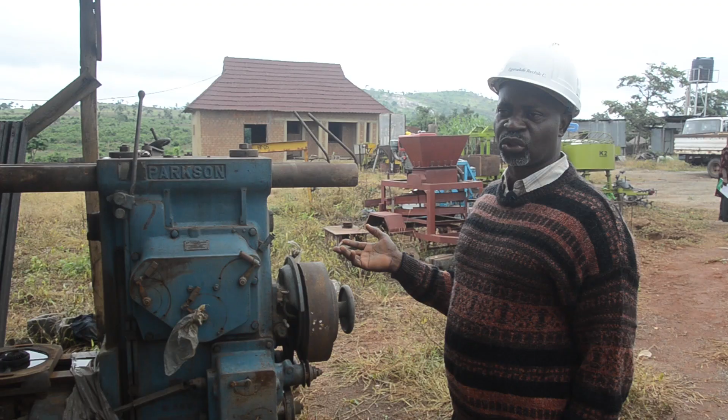For a start, let's take you to a technology farm here in Abuja where indigenous fabrication of machines is practiced. Meet architect Christopher Egwudali, a farmer, civil servant, and fabricator of machines. He is a typical example of a Nigerian with a burning desire to research, design, and fabricate multi-purpose precision machines using local materials and expertise to achieve his objective.

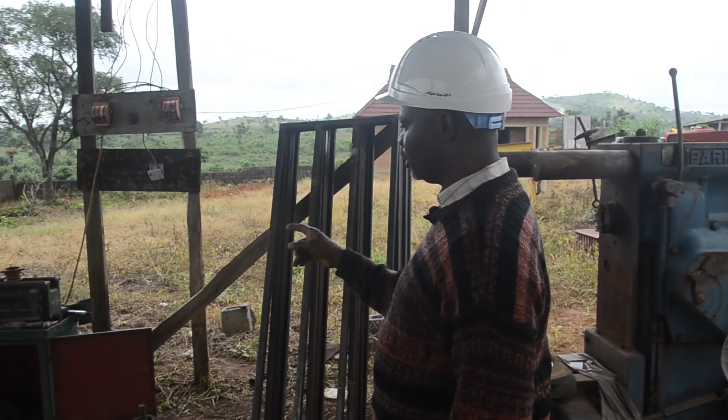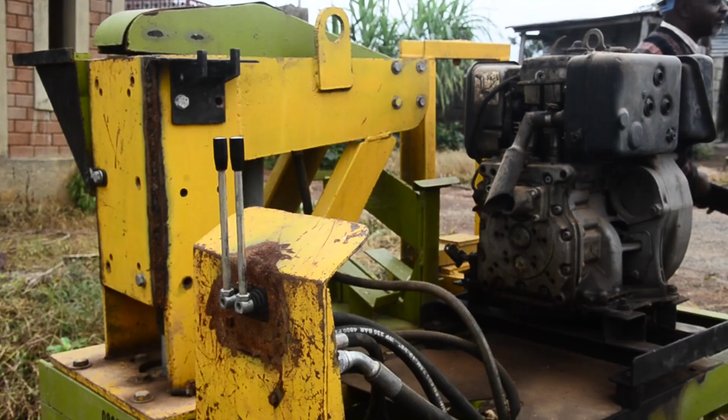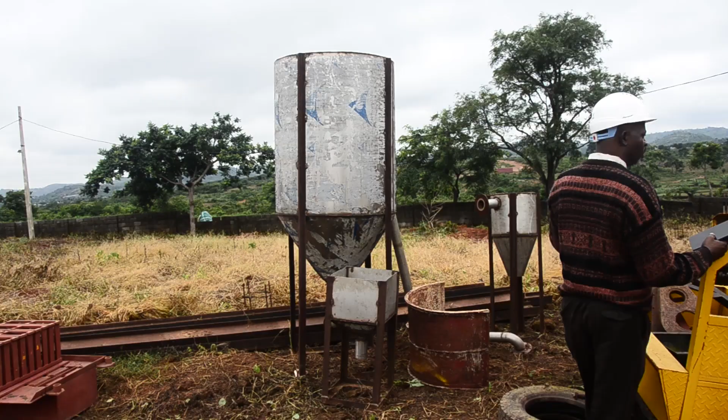His technology farm is located on the slope of Mpape Hills, where he has been practicing construction of machines for over 20 years. At the time of a visit, some of the machines had become dysfunctional due to lack of funds to carry out the necessary repairs to put the machines back on track. He told Think Tech Crew that because of paucity of funds, he could no longer offer training to younger Nigerians on the art of machine production. He was, however, optimistic that a change would come to rescue the technology enclave from its present state.

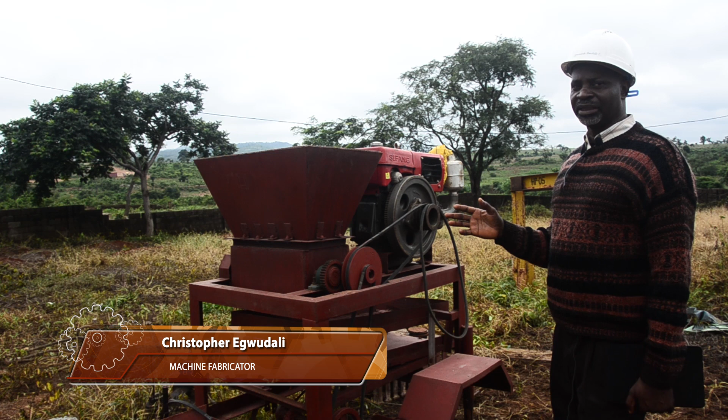This is a pulverizing machine, my own creation. Unlike some of the machines you have seen, which are reverse engineered, this was my creation. It came about when I was doing some jobs, building an estate in bricks. I discovered that the laterite was being wasted. After sieving the laterite, it's quite a lot of manual labor, and the lumps that come out are usually wasted. So in a trip of laterite you get maybe about 1,000 bricks, and the rest is wasted. So I created this machine. It breaks the laterite, then sieves it, so you can use the whole trip of laterite, thereby reducing the cost of the bricks. That is the work of this machine.

It's a milling machine, used for fabricating gears and a lot of things. You can make screws and do a lot of things with this milling machine. So this is one of the crucial machines in the fabricating industry.

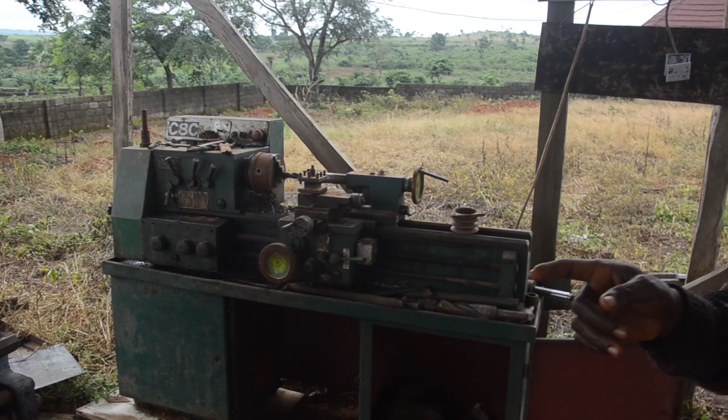This machine is called a lathe machine. I have two of them here, a small one and a big one. This machine is also used for making pulleys, pistons, and a lot of things, anything that has an axis, this machine is used for producing them.

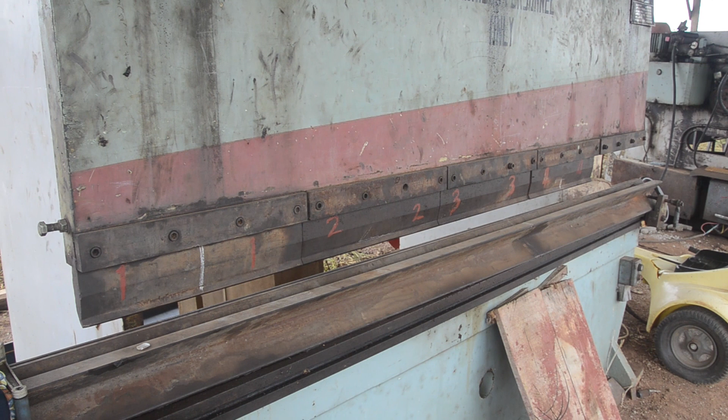Here is a bending machine. It's used for making things like containers, overhead tanks, tables, also to bend a flat sheet into shapes. This is used for doing that. It's a bending machine that can bend metal up to 10mm in thickness.

This is a drilling machine. It's used for making holes into metal, wood, or anything. In case you want to do threading, you also use it for this.

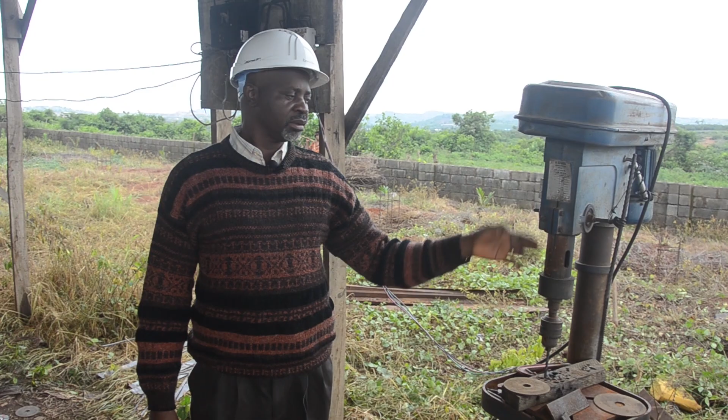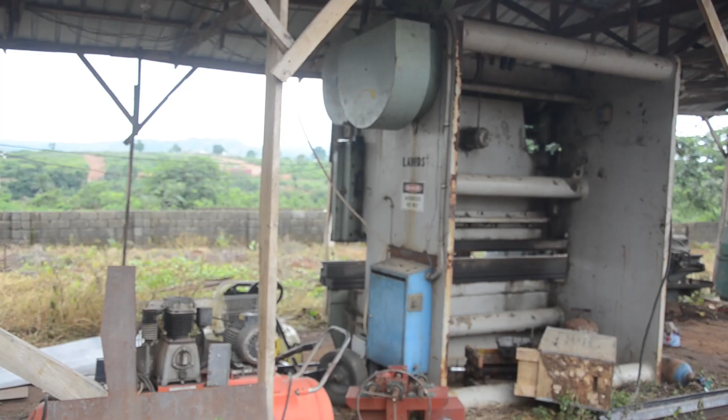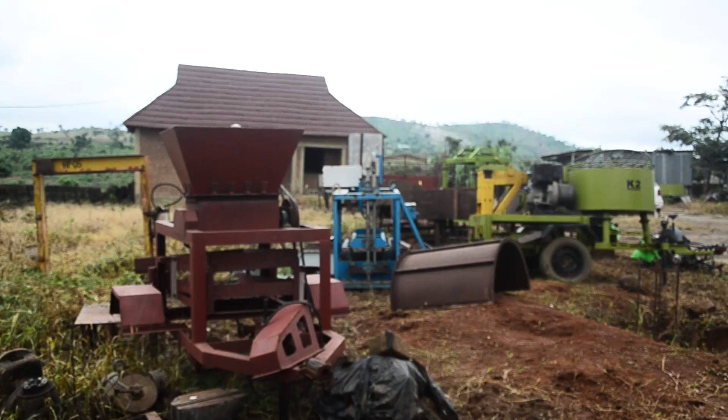From all indications, the challenges confronting the growth of indigenous technology are enormous. First, funds are not readily available to support research and necessary tools for construction, as well as configuration of machinery. There is an unquenchable desire for foreign-made machines, leading to low or even zero patronage of locally fabricated ones, plus absence of commercialization of research results that have the potentiality to trigger successful production of locally made world-class machinery.

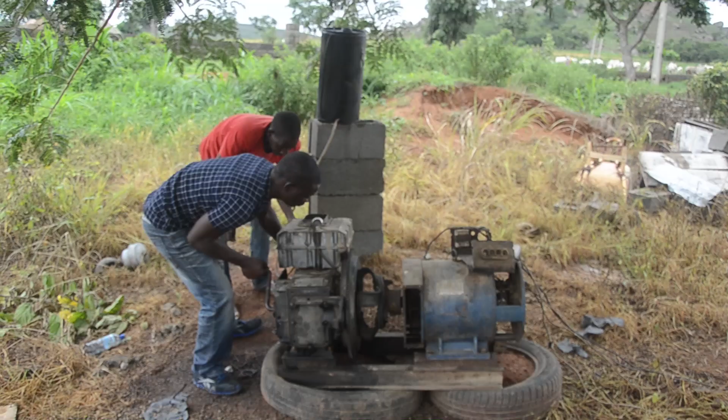Some Nigerians, like Christopher Egwudale, are not giving up, believing that technology revolution is the answer to the problems in sectoral development in Nigeria. The work I do here is site improvement, any generator, all the machines and engines we are using, I'm the one maintaining them for the past 10 years up to this time.

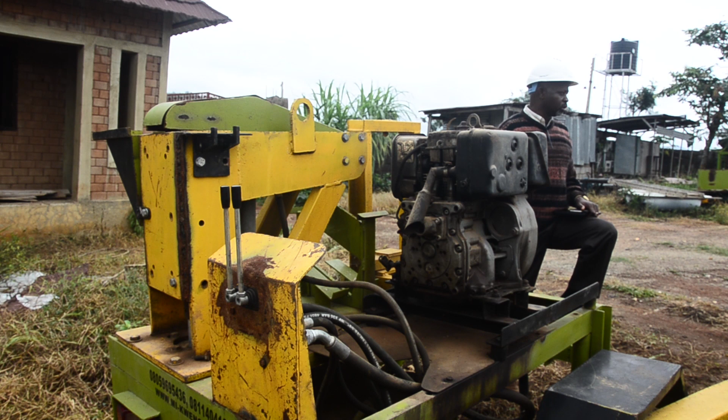From your experience, do you think there will come a time when Nigeria can manufacture its own machinery? Yes sir, thank you for your question. If we can see the way our guy here is doing it, if a lot of Nigerian people could do what he's doing, we the youth of this country would benefit a lot. But we have nobody else, it's just this one guy trying, for us to be doing these kinds of things where, if we reach out, we could find small things to feed our families.

I want to beg our country, if they can help us, our youth, we are just here for nothing. But can you see the way our guys are doing something here, everybody is busy. See the concrete mixer, we are manufacturing concrete mixer here, we manufacture a lot of things, molding machines, different types of equipment, we have it here.

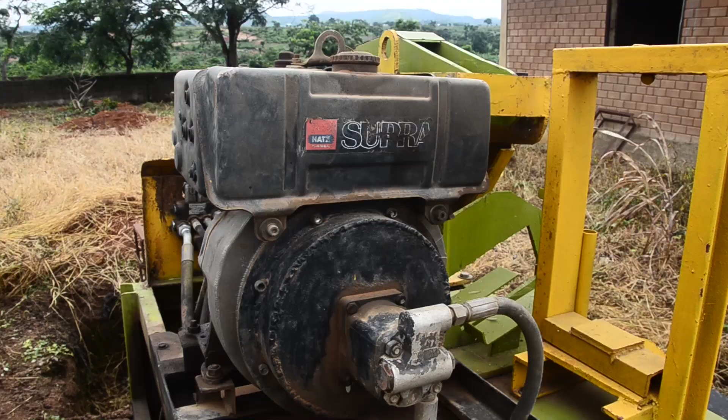I want to beg our country people, may they help our Oga with a lot of money to establish more than this for us. Because if the Oga can have money to manufacture all these things more than this, everybody will be busy. I can remember there was a time when we were working here, we were more than 500 workers. But now there's nothing going well like before.

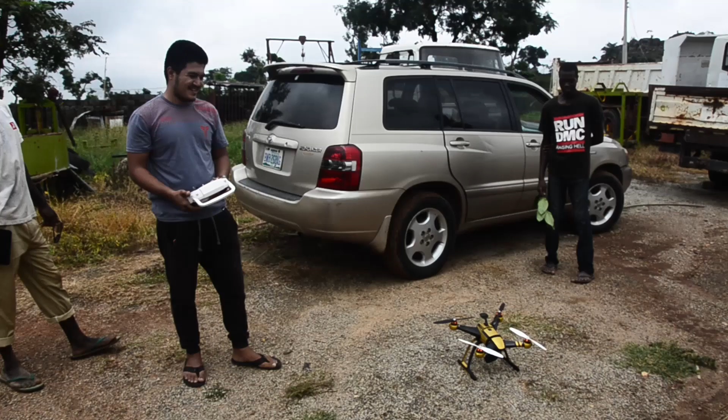Think Tech caught up with a Port Harcourt-born Filipino-Iranian, Afshin Farunzan, an economist by training, but a technology enthusiast who developed skills in the repair and construction of drones. He says technology runs in his family's DNA.

Well, my view in Nigeria is that basically as long as you give somebody an opportunity, they can always have that chance to do the best with it, right? Nigeria is already a country where we have our independence. We don't need to rely on other countries to bring in stuff that we actually need for our day-to-day work. For example, if we need bricks now, we don't have to import them from abroad.

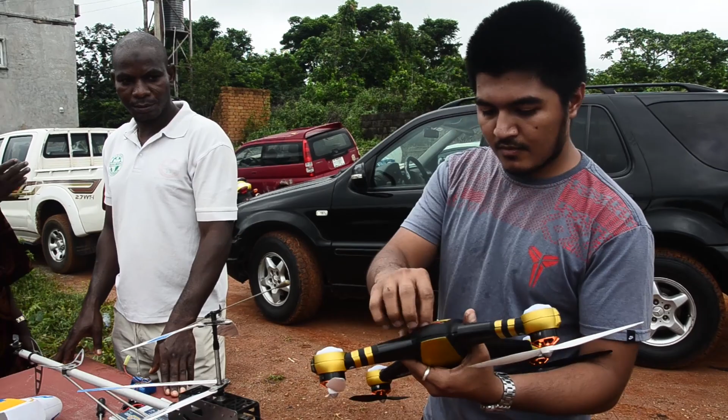We actually have the machines here now that can make them at a cheaper cost and also use part of Nigeria's raw materials as well, because we don't need to import everything from China, because nowadays the quality is low, the standard is low, but then we're paying so much for it. Not just that, but we're also paying taxes and we have to wait so much longer. We're not even sure if those people are going to come through with their promise or make it the quality that we want.

Nowadays, the problem in Nigeria is just low quality everything, and I believe all of that just started from people who import and export, right? There's no more standard quality check. But look at this now, this house was built here with our own brick making machines, and it barely cost as much as it would have taken if we were to have hired or brought in resources from abroad.

The future is now in Nigeria, and it doesn't matter whether you think we know how to do something or not, because you can always train somebody, you can always teach somebody how to actually use the machines. It's not something you need to go to school for, because at the end of the day, if somebody has a passion for something, then they would excel in it, whether it was their course or not. As long as they have a love for something, then they can really push boundaries.

Available records indicate that there are many Nigerians who have acquired skills in machine fabrication and who have made machines of different forms and sizes for different purposes, hoping to get funding or have their products commercialized for the benefit of Nigerians. Today, we will learn about virtual manufacturing, a process perfected by staff of the National Agency for Science and Engineering Infrastructure. It's a sophisticated production method with precision and accuracy, most efficient, and the current global approach to modern manufacturing. Bayomi Adesala is our guide.

Here, we do the design, analysis, and e-manufacturing of parts before we commit any material into them, meaning waste is eliminated and margin of error is very low, because before we commit any material into it, we actually do the simulation, design and simulation of the component and see how it will come out when it's finally being produced. And it makes the work easier and flexible, because we can actually do a lot of changes as we go on in the design work.

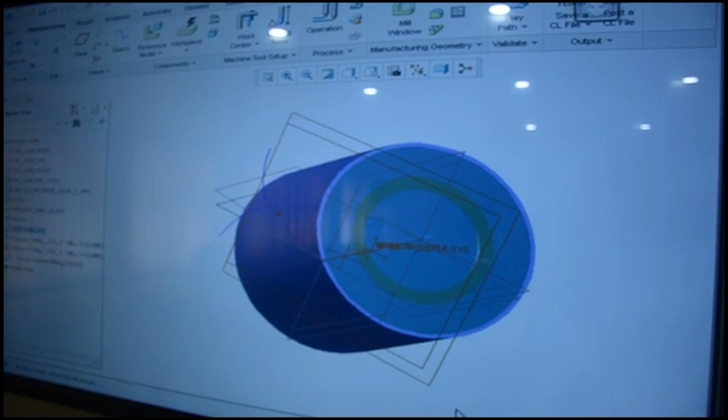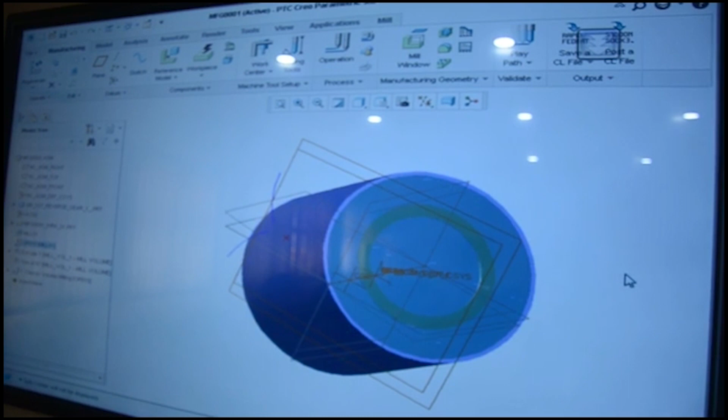We'll just briefly do a demonstration of one part to show how this equipment here works. We have different software coming together to form the crux of what we do in this virtual manufacturing laboratory of the National Agency for Science and Engineering Infrastructure. Here on the screen we have a gear that's been designed. It's a gear, a part of the gear train of a tractor. So we're going to show you how this process of e-manufacturing is done using this particular gear.

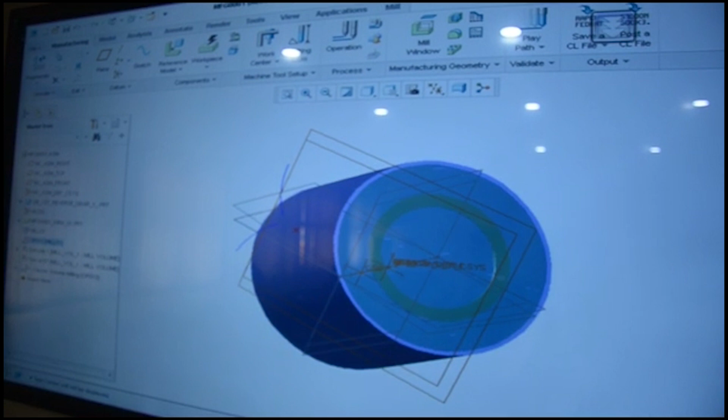Here, we're taking it from the design stage. The design has been done, and we have it here. We're going to cut the gear from this blank we have here. So let's just quickly go to that part of it that cuts and generates the code.

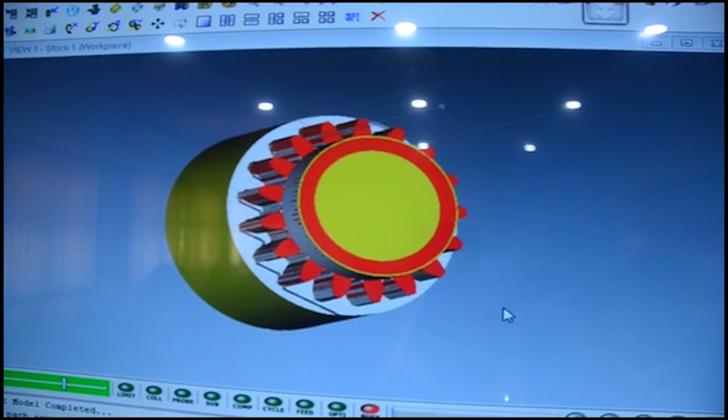Here is a blank workpiece where we're going to cut the gear from. As we go on, the system uses the tool to cut the gear just like you have it on a CNC milling machine. Doing the cutting of the gear is actually a milling process.

Every stroke of this cutting is recorded at the back end of the system, and that is what will be retrieved at the end of the cutting when the job is certified as perfect to what we want it to be. Then the code can be retrieved and sent anywhere in the world for the actual manufacturing.

Reverse engineering is an integral part and process of technology acquisition globally, and in Nigeria it's a process whose potentialities are largely untapped. But there are signs of improvement in the advancement of reverse or back engineering, as it's referred to in some quarters, to enhance the nation's growth in local manufacturing of technology-driven products. I took up Professor Mohammed Haruna of NASENI on this with a view to eliciting information on the legality or illegality of reverse engineering practice and how it can impact on local technology.

Reverse engineering is another term for copy engineering. It means you see a product that is technical in nature and you want to reproduce the same. You want to copy it and produce it. That is exactly what it means. You want to duplicate what you have seen. Generally, it is something you didn't know how to do before, but you want to learn how to do it, applying engineering principles and methods in producing the same product of the same quality.

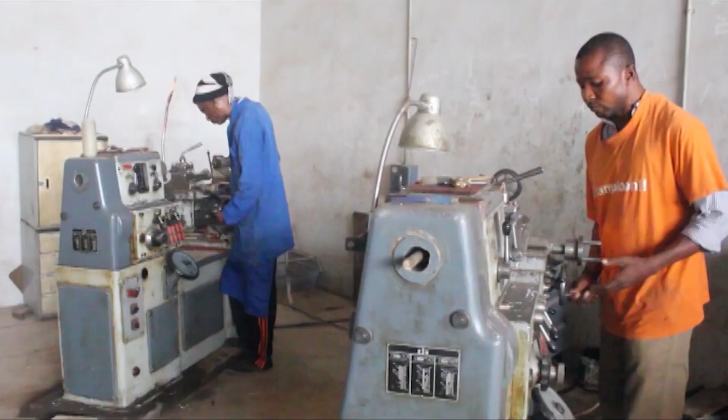Now, what are the basic steps required to achieve efficient reverse engineering? The stages involved: first and foremost, you have to analyze and understand the functionality of the equipment, and also refer to the sciences and engineering principles by which the equipment is operating.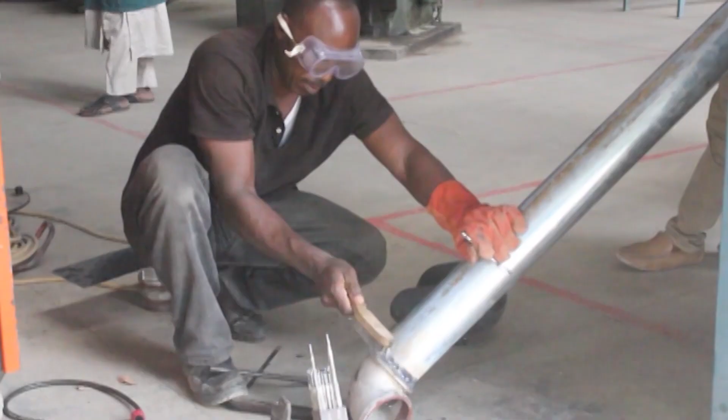Next is to dismantle the equipment carefully while taking note of how everything is assembled. In doing that, you make labels and markings to ensure that when reassembling, you won't miss any part. After doing that, you attempt to reproduce the different components that make up the system or machine. That is the traditional way.

But the method has changed with modern and advanced technologies. In modern days and advanced manufacturing processes, all you need is a machine to scan the equipment with accuracy. It will scan it, provide all dimensions accurately, and give you the readings without having to use manual means like tape measurement or a ruler to measure components. What is generated during scanning becomes a computer code which can be transferred to a computer numerical control, or CNC, machine to reproduce the same thing.

However, before then, you will want a 3D version from a 3D printer so you can check whether the shape, size, and everything is exactly like what you want to reverse engineer. In addition, the process provides an opportunity to test performance on a virtual manufacturing machine. That is, by visualizing exactly what you want to produce, you see it pictorially in a 3D model, and you also operate it virtually to test performance.

And from reverse engineering to patenting, which is a prerequisite for owning intellectual property. Patenting is an exclusive right to a product. Today on Think Tech, we sought to learn more about the concept, types of patents, the process of obtaining it, and what can and cannot be patented. Let's now talk to Dr. Dan Azumi Ibrahim, the Director General of NOTAP, an agency responsible for patenting of Nigerian products and services.

Patenting is like protecting the intellectual assets you have. All manufacturing processes are products of research and development. Somebody, or some team, has spent time, money, and resources to come out with a process. If you don't protect that process, somebody else can take that same process, make use of it, and make money with no litigation whatsoever. So when you come up with any innovation that could translate into products, services, or processes, you have to protect it because it's your intellectual asset.

More than 90% of the technologies that power the Nigerian economy are imported technologies, products of research and development from other developed nations. So as a nation, if we want to remove the level of dependency on foreign technologies, we must sensitize our researchers on the need to protect their intellectual assets. What is happening now is that most researchers, whenever they hit any innovation, are in a hurry to tell the whole world, and they publish it. Once you publish it and it comes into the public domain, you have no monopoly whatsoever over the intellectual asset.

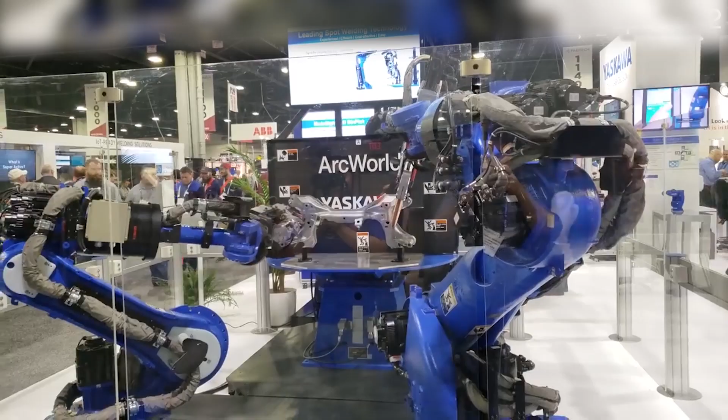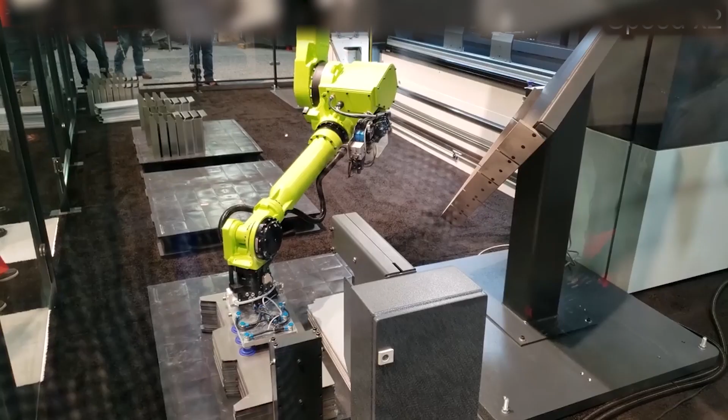Now, here is something to share with you before we conclude today's edition of Think Tech. With the creation of robots, particularly industrial robots, people became apprehensive about machines taking human jobs. But today, industrial robots are believed to be clumsy, according to experts. This is because industrial robots can repeatedly pick up a component on an assembly line and deposit it appropriately with amazing precision and without getting tired or bored. But move the object half an inch, or replace it with something slightly different, and the robot will fumble ineptly.